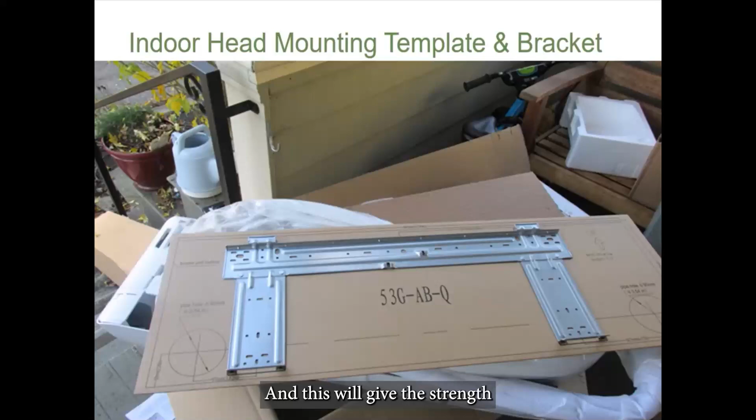So this is an indoor head mounting template and bracket. This is going to be really important. And if you've ever had to, say, hang a TV, a flat screen TV, it's a similar type process. We want to make sure that this bracket is properly secured to the wall, so it's mounted onto the studs, and this will give the strength to hang the ductless heat pump indoor head onto the bracket.

And here we have someone actually mounting a ductless heat pump head. The indoor head mounts and secures directly to that bracket. What you're not seeing here is, some holes had to be drilled in the building beforehand, and the electrical and the refrigerant run through, but this is what it looks like mounting that indoor head.

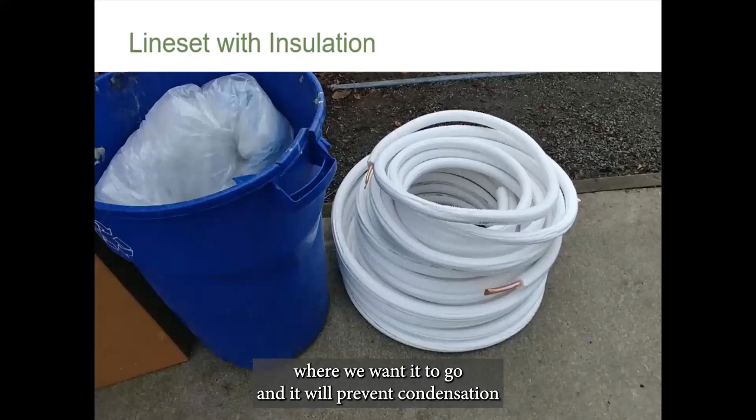This is the line set, or that refrigerant tubing, and it's already got insulation with it. This is how it typically is shipped, and so we want to make sure that when we install this line set, or these refrigerant lines, that we really do have quality insulation covering it all the way from the compressor to the indoor head. This will ensure that we actually get the heat to transfer where we want it to go, and it will prevent condensation on these lines, which can always be a challenge.

Running that line set is going to come with some things you really do need to be thinking about. What is the pathway you're going to use to get from that indoor head to the outdoor compressor? In other words, are you going to have to go through an attic or a crawl space, or can you go directly through the wall as we've seen here? You want to understand the distance to that compressor.

Most of these pieces of equipment come with about a 25-foot line set maximum before you have to start weighing in refrigerant. And you can quote me on that to a degree, but please read your manufacturer's specifications. Each manufacturer will be a little different on the appropriate line set before you need to weigh it in. So that distance is important. If you can get within 25 feet, that's going to be really great.

And of course, you need to think about the obstructions that might be in the way. Is there a dog house there? Are people storing things on the exterior of the building? Is there a lot of shrubbery and bushes? Those things can all make an installation much more challenging and can make any type of work later much more challenging as well. So these are all three things that you really want to be considering when thinking about running that line set.

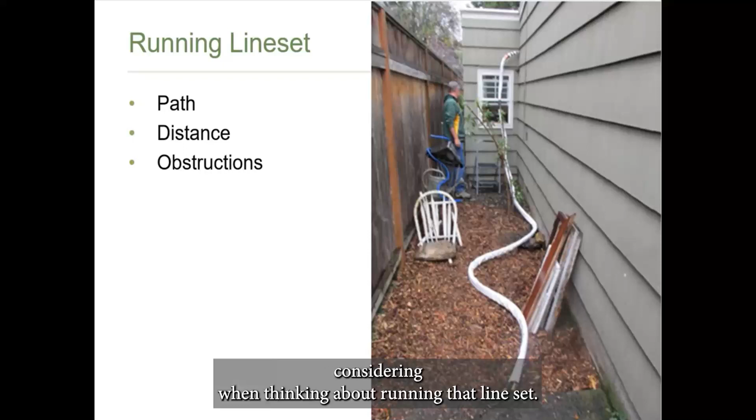There are two different ways you can mount a device. You can either mount it on the ground or on the wall. And in scenarios where you have a lot of snow, snow drifts or high regular amounts of snow, mounting it on the wall can be a really nice option.

This can also be for those instances where you need to mount it much higher, say for a second floor. So if you have a split home and you need to mount it higher, these wall mounts can work quite well. Similar concept to that indoor bracket, but much more rugged and sturdy because it has to hold this heavier compressor on the outside.

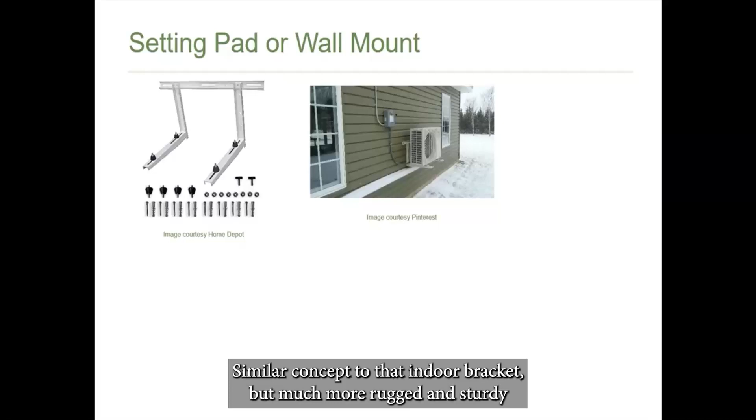If you're installing one on the ground, you're going to need to have one of these pads, and it can be a concrete pad, or they sell specific plastic pads just for this purpose. And we'll talk a little bit more about setting this, but you'll want a pad, you'll want some risers. You see a couple different versions of those in the lower right-hand corner, and those are enough to give you some clearance off the ground. So whether it's leaves or debris, running water, or even a little bit of snow, you've got that clearance underneath your compressor.

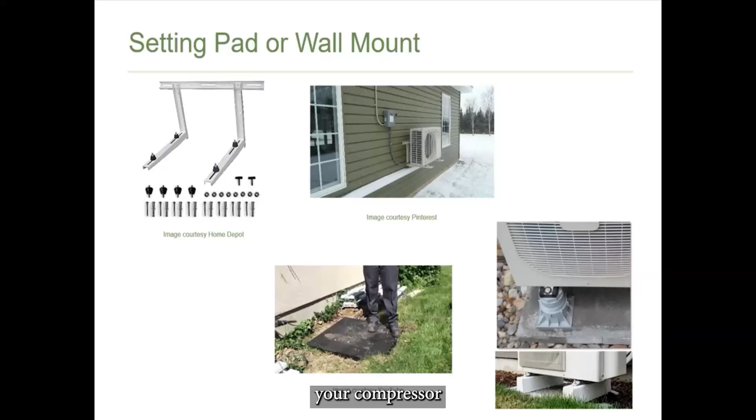Connecting the line set. This is where that torque wrench is going to come in handy, and you're going to connect it at both the compressor on the exterior and on the indoor head. One of the challenges here is getting that insulation just right. And we'll talk a little bit more, but the insulation around these line sets, try not to cut it off too much. It's better to scrunch it back when you make your connection so that it flexes and covers this entire line.

Weighing in refrigerant. So I talked a little bit about this. You will need to have an EPA 608 refrigerant license in order to be able to handle refrigerant. And the EPA a couple of years ago passed new rules that have to do with handling and recording of refrigerant that's weighed in and waste refrigerant after any job. So you're going to need to have that certification. You're going to want to have your programmable scale and your gauge and hose set in order to do this.

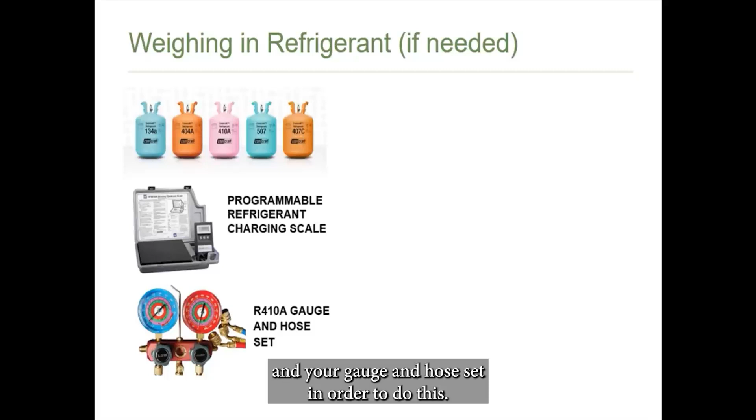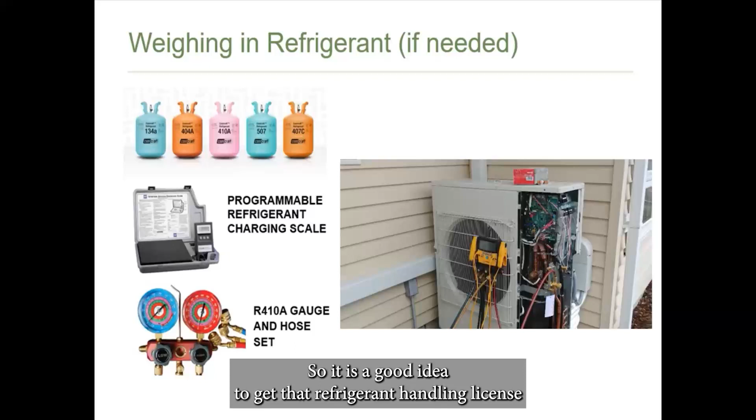Again, as I stated, for a lot of devices, if you're able to put them within 25 feet of line set run, you may not have to weigh in any refrigerant. But what we find is most contractors, while that's their first goal, will inevitably find some scenarios where they really do need to run it longer. So it is a good idea to get that refrigerant handling license and to make sure you have the right equipment to do this work.

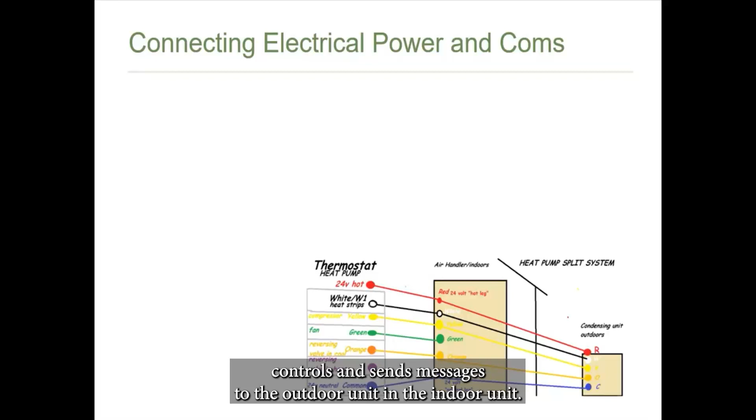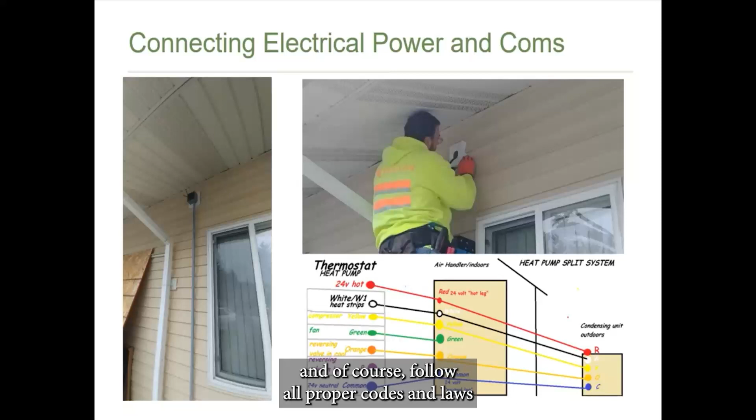There is going to be some connecting of electrical for both power and communication, so that the wand inside actually controls and sends messages to the outdoor unit and the indoor unit. So you're going to need to be thinking about this, and this may require that you either subcontract an electrician or you have an electrician on staff to be able to handle this work. And of course, follow all proper codes and laws when handling any electrical equipment.

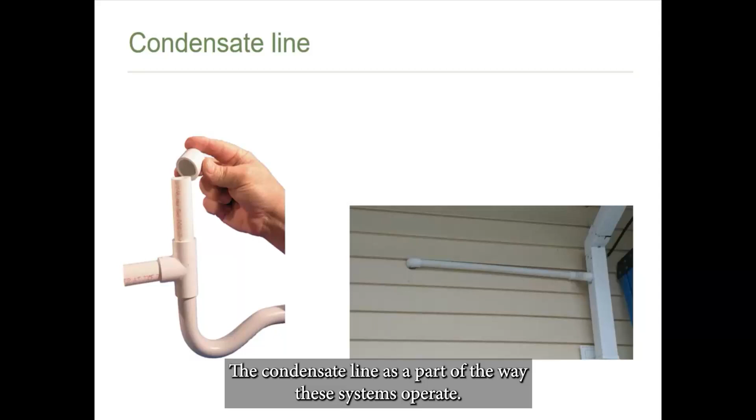The condensate line. As a part of the way these systems operate, condensation is created in the indoor head, and that condensation needs to go somewhere. So it's recommended that you bring that condensate line to the exterior of the building. One of the tricks you see on the right-hand side of the screen is this clever installer actually ran the condensate line directly to a downspout. So this has a way for that condensate to actually move itself away from the building and not create any wet spots either on the siding or at the base of the building.

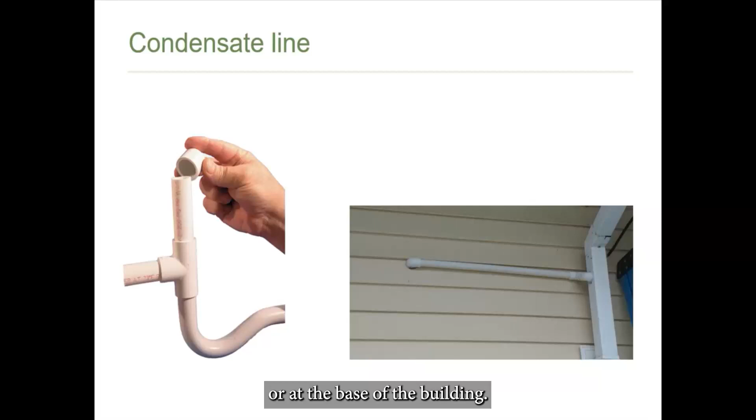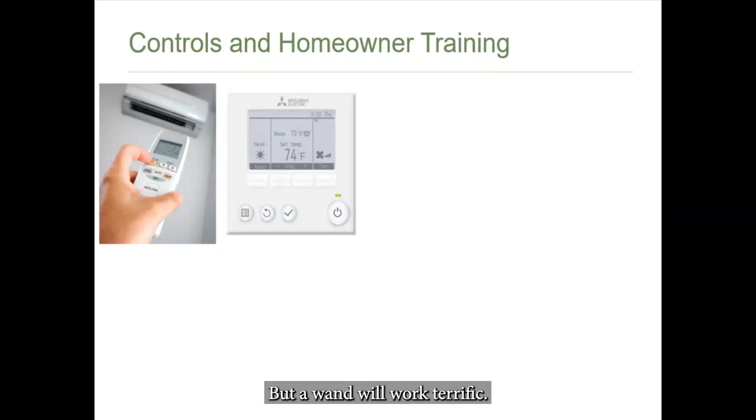Controls and homeowner training are also going to be critical. I mentioned the wand is the standard, but they do have these wall-mounted systems, and each of the major brands do have their own wall-mounted temperature controls that allow you to treat it much more like a standard thermostat, but a wand will work terrific, and it's not necessary that you move to this. It's just good that you know that it exists, so when you have this conversation with consumers, you have a good idea of how you want to do these controls.

Many of these brands also are starting to develop apps that can be used much like a smart thermostat. You can log in, you can check the runtime of your unit, you can adjust the temperature remotely, and it actually will work as a kind of a backup wand or backup controller. So look to that if this is something you think your consumers might be interested in. Talk to the manufacturers and distributors and pick products that actually include these types of apps or smart controllers.

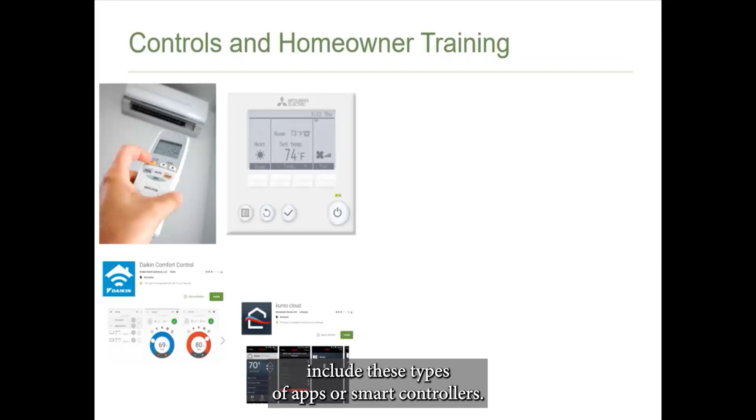And finally, really, the number one thing that we find in quality control problems is improper homeowner education and improper homeowner expectations. So you really do want to go through the process of training the homeowner both how to operate their system, what to expect from their system, and the basic maintenance that comes along with these systems. Some of the maintenance items associated are cleaning the filter on the indoor head and checking that condensate line at least annually to make sure there's no blockages.

The Northwest Ductless Heat Pump Project does provide a lot of collateral, and we'll show you in the resources at the end the website, and you can go and download these, and they can be really nice pieces for you to use when you have the conversation with the homeowner, but you can also use collateral that has been developed directly from the manufacturer you're working with.